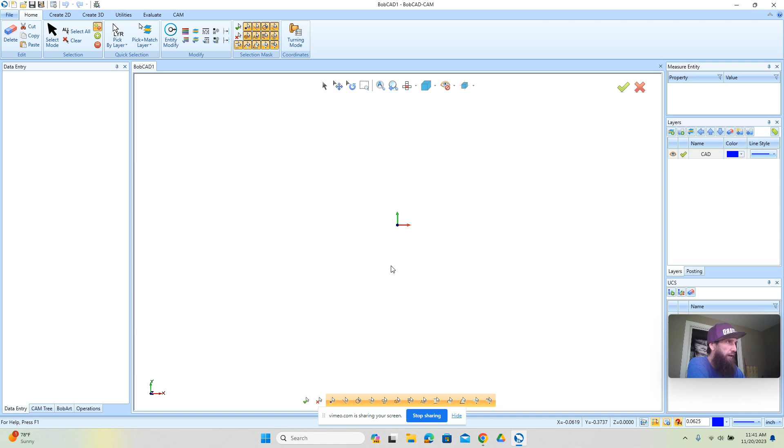All right, let's get into it. We're using BobCAD version 35 here. This is a really good piece of software, and it's going to make it easy for pretty much anybody to get up and running quickly. There's also Easel, Fusion 360, and a bunch of other packages out there, so you're more than welcome to have your go at it, but in my opinion, this is a great place for you to start.

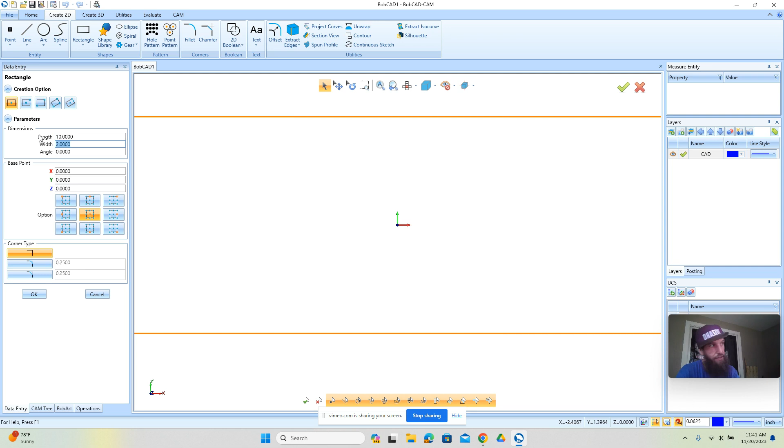Before we really do anything, a good option is to draw an outside shape first. In this case, I'm going to do a 10 by 10. This is just good general practice: draw your outside shape first, and once you've done that, draw whatever it is you're going to cut inside of there.

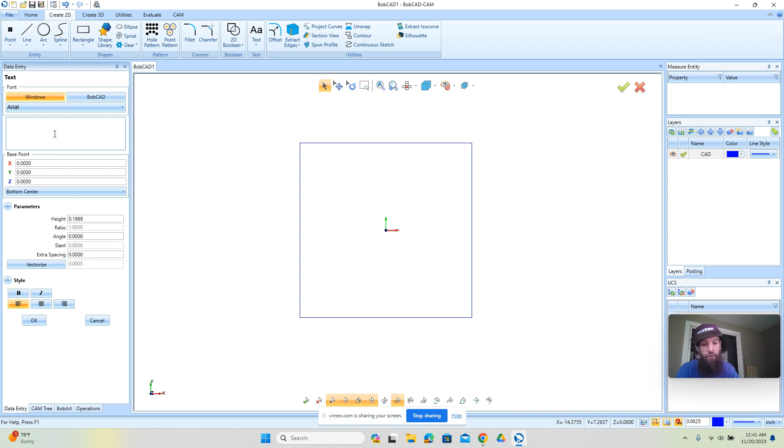Now, for us, we want to do some letters. So what we're going to do is just draw the letter A here, make it larger, something like this, put it on center, maybe make it bold. All right, so this is our letter.

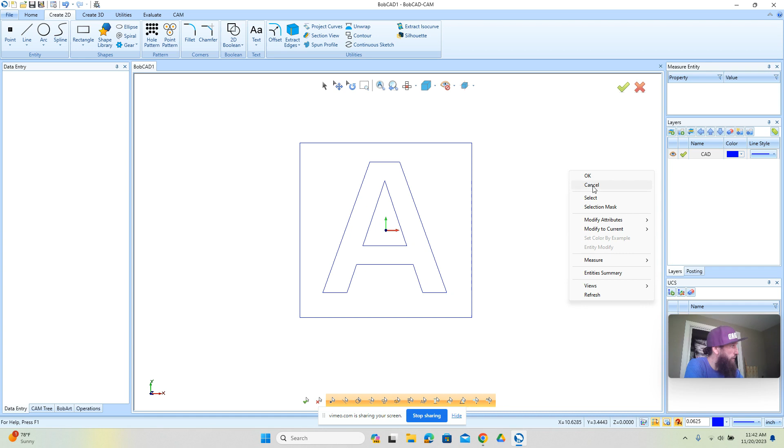Essentially what we're going for here is a stack-up style, so what I'm going to do is add a little 3D effect. Depending on your material thickness, you can kind of see the overall look. So let's say we're using quarter-inch material.

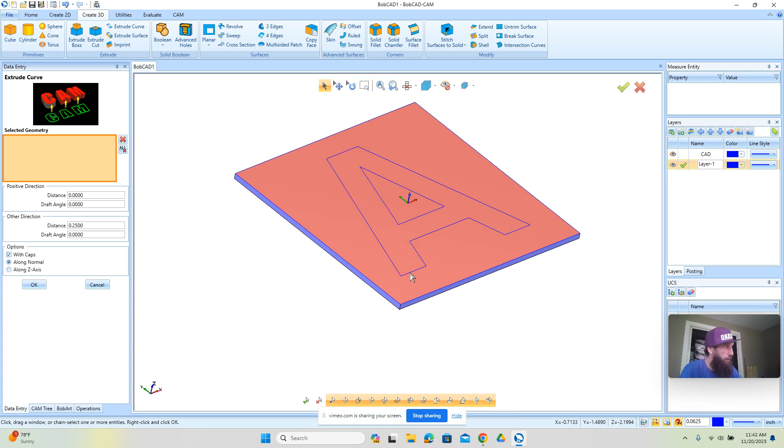We'd have our backer be a quarter-inch, and then our letter being a quarter-inch. We want to make sure the letter is going up, so to switch which direction, it's either this one or this one. We're going to make this a quarter-inch, so overall a quarter-inch for the backer plus a quarter-inch for the letter means a half-inch total.

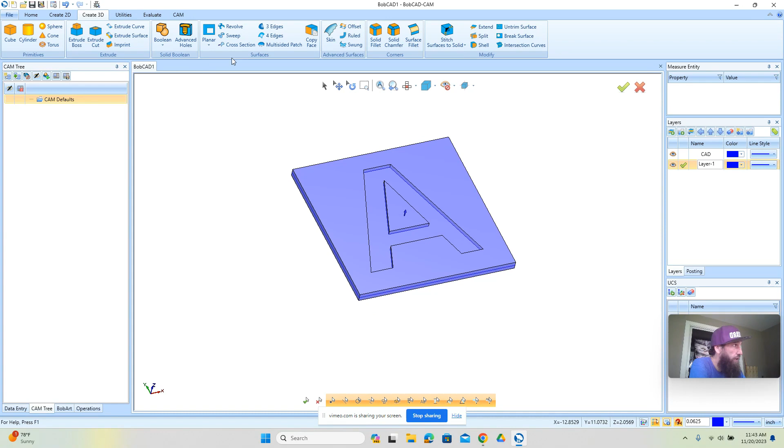You can see I made a mistake here, so let's go back to our CAD tree. If the CAD tree isn't open, go up here and turn that on. On this one, we're just going to edit what we selected - it appears we picked up a face as well, so we're going to remove that face, and then we just have the letter that we want to work with.

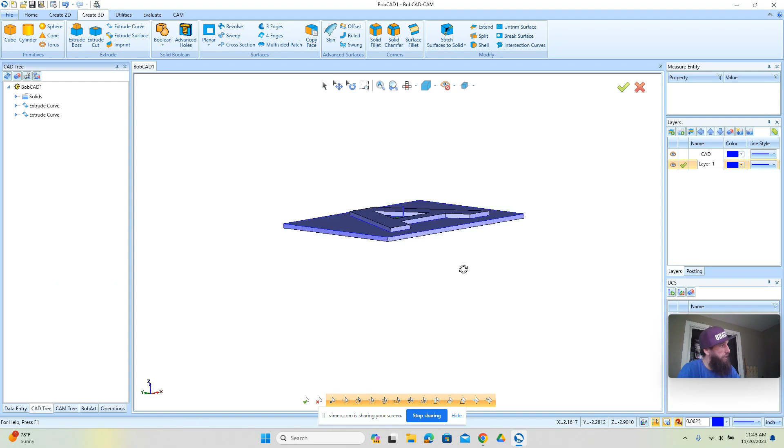Again, we can hit S on our keyboard for shading, so we can toggle that on or off. Essentially, what we're doing here is we have our backer and then we have our letter.

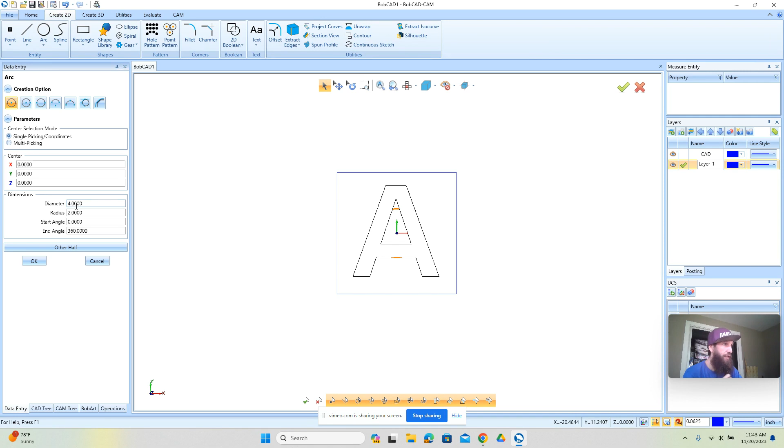Now, in order to machine this, we need to add some pin locations. We need to do that on the backer, but we also need to do it on the letter. So we're going to add some hole locations here, and in this case we're going to use just a quarter-inch dowel.

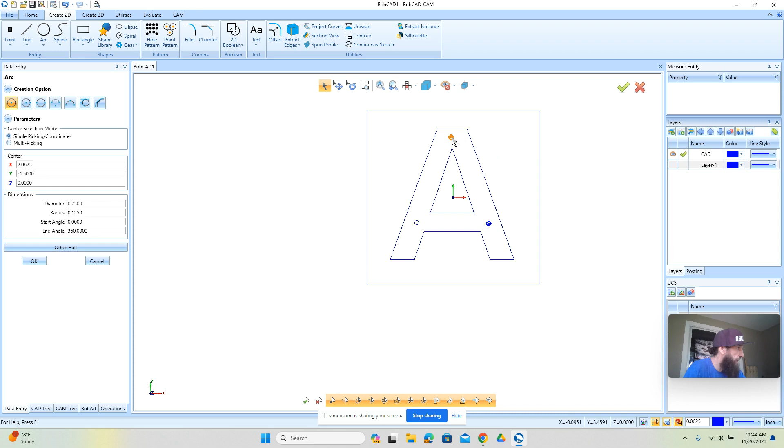What I'll do is put the 3D on its own layer so we can turn it off and hide it so it's not in our way, and then we can just pick a couple of locations. Now, this letter is a bit bigger, so I'm going to use 3 pin locations, but maybe you just use 2 - the whole point is just to support the letter. So for long, thin pieces, make sure we have some extra hole locations to support the letter on the back.

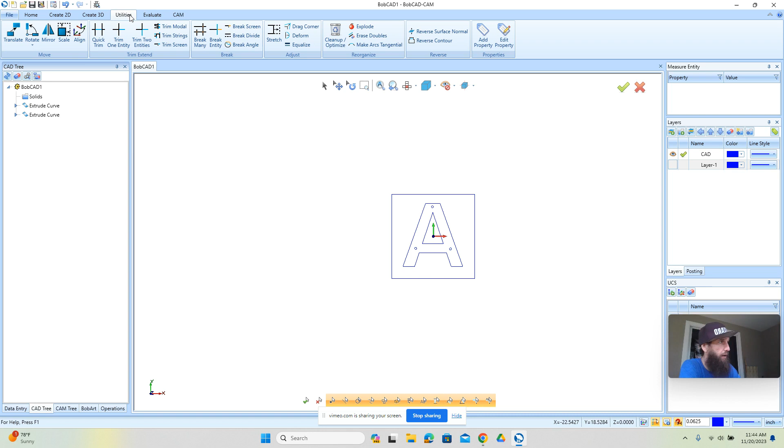All right, now when we cut this out, we're going to mirror it. To mirror the geometry, we'll go to Utilities - that's where all our editing is done. Come over here to Mirror, go ahead and select what it is we want to mirror, then pick a line we want to mirror around. We'll select this line here, and then we have our letters that we want to cut out with their hole locations.

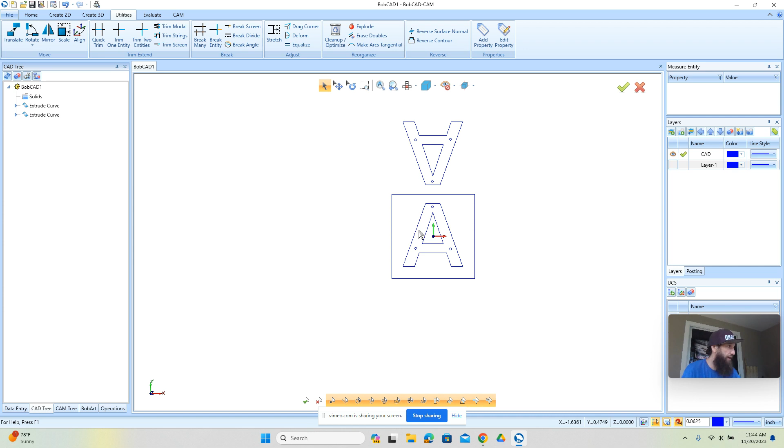And then over here, this A, we actually get rid of this - we don't need this one, we just need the hole locations for the backer. So on this side, I'm sorry, this side is the backer, and the only thing we need to do here is drill the holes. Then on this side, this is the letter cutout.

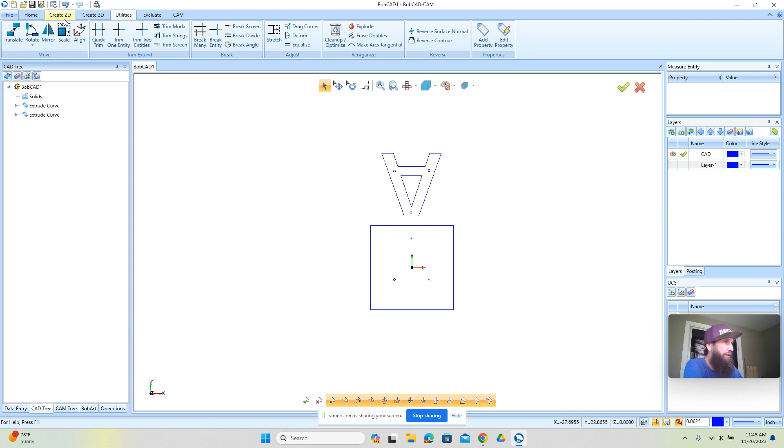Now, when we set up our material, we're going to put both of these in here. But what I'm actually going to do is just move it over to here, so we're going to go to Utilities and Translate.

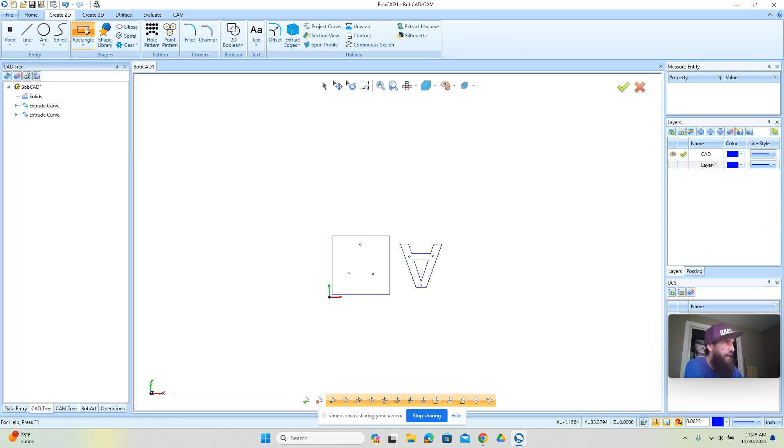I'm going to move this guy over to here like this. I'll say OK. And then what I'm going to do is move both of these up and inside of here. The reason I'm doing that is I haven't drawn my stock yet, but when we actually cut this out of material, maybe a 24 by 24, it's a good idea to draw the material and the zero so you can see exactly what's going on, the same way it would be out on the machine. You want to draw it in your CAD system.

So the backer shape and we have the letters. We're going to do the holes here, then cut out the outside shape for the backer, then do the holes for the letter, and cut out the inside shape and outside shape of the letter. Then we'll be able to pin these two together and paint them different colors. It's one of the methods you can use for indoor and outdoor signage, the pin method.

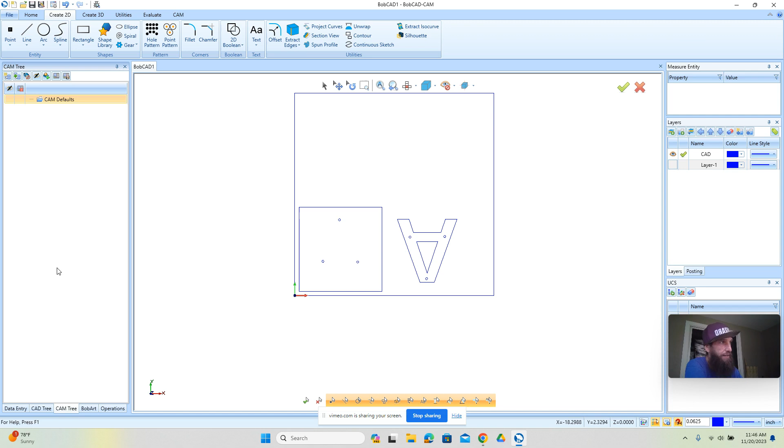Okay, so let's go over and get into the CAM tree. This is where all the machining is done. There's really three steps here, and every time you're thinking about a project, you want to break it up into these three steps. The first step is the CAD, that's when we're drawing stuff. That's what we just did, we just did the CAD step.

The second step is the CAM, that's where we're going to program where the tool is going to go to cut things out. And the final step is the CNC, that's when we're out on the machine and we're running it. Now, the reason I bring this up is in each of those different steps, you think about different things. You want to pay attention to different things, and you might even think there's a different checklist for each one of those steps.

So we did the first step, which was the CAD. Now we're going to do the CAM. Being the first time we're going through this, you can see there's nothing in the CAM tree here. So what we can do is set up some defaults, and we can also load some templates, which make programming jobs like this easier, especially if it's something you do all the time.

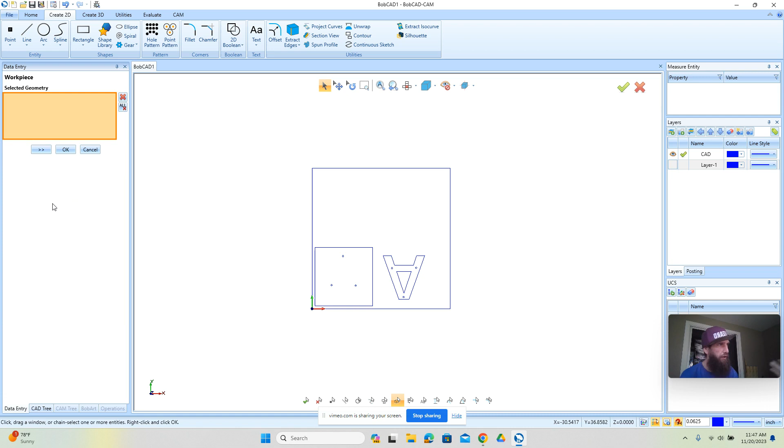So for us, we're going to just create a new job and pick the machine. This one's going to run on an industrial CNC router, probably one of the more common machines out there. Very popular, affordable, I just love them. They're really easy to set up and run. Highly recommend them, especially if you're new to CNC, or in the signage, indoor/outdoor signage, print and cut type market. This is a good piece of equipment to cut your teeth on.

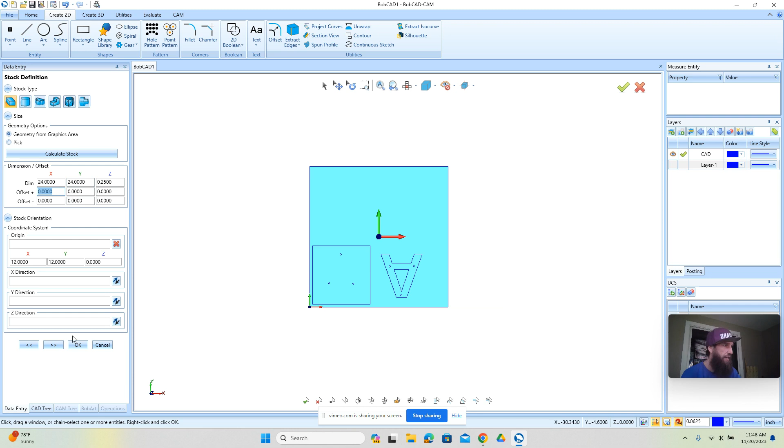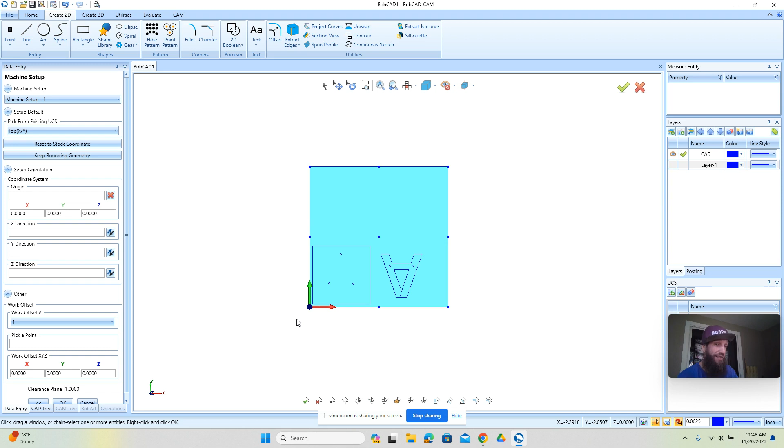So from here, we're going to just set what the material thickness is. Our zero is going to be this corner. Depending on your machine, like when I come on site and train you, we'll pick a position based on where the machine is and things around it. But you may pick a zero that makes more sense to you, or some of the more traditional locations is this upper corner here. You just really want to make sure the zero here matches the zero out at the machine. Once we've done that, we have our job set up.

From here, we just want to come in and make these holes. Now, these machines, some have tool changers, these machines don't, the industrials don't. A lot of home-based machines or single function equipment may or may not have tool changers, or you may have to change tools manually. So what we try to do is use a single tool for everything, and we look at our flute length, how much flute we have to cut, and our diameter of where we can cut.

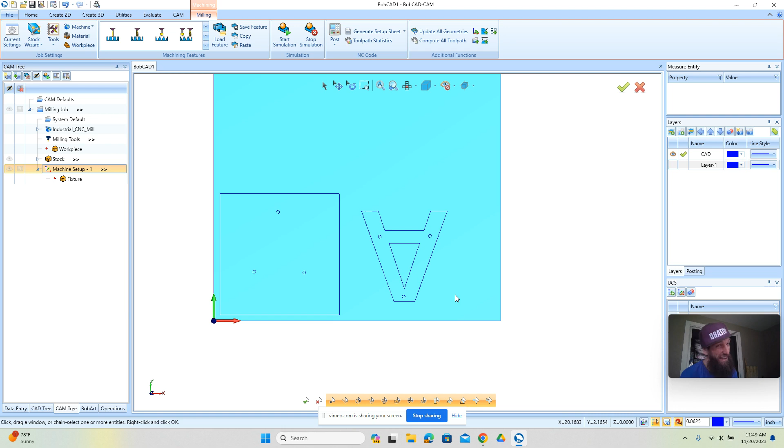So we have 250 holes, so we're going to profile everything. We're going to use one operation and do everything one way, and we need to make sure our tool is small enough to fit where it needs to go. So if we're in a 250 hole here, our tool would either need to be 250 and just go down into that hole, or it would need to be a smaller diameter than that in order to profile around it to offset.

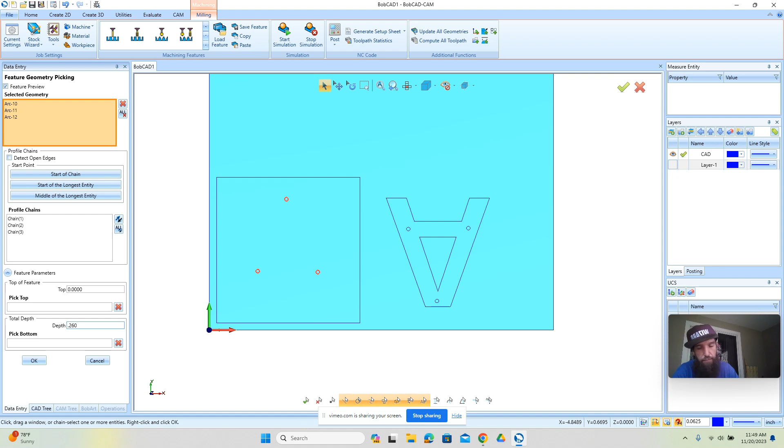So for us, we're going to do a profile routine. Profiling is probably one of the most common things you would do. I'm going to just start by picking these holes here. Our depth here, we're going to make it a little bit deeper, 260 - we're in 250 material, we're going to make it 260. We'll say okay on that. Now there's some different operations here, because once you select geometry, there's a bunch of different things you can do with it. For us, we're going to just use this rough routine, and we'll set our tool size.

On .1875. And then over here, our speeds and feeds - these particular industrial CNC routers, you control the spindle out at the machine, so we don't have to type that value there.

As far as cutting goes, I just cut everything at 50 inches a minute. This is a good starting point for most materials, especially something you would run on this equipment. It also takes the guesswork out of how fast to run. We'll run at this speed, and as we get more comfortable with it, we can turn up our overrides or start to run faster once we get more comfortable with how the machine moves, how to program, and load and rerun programs.

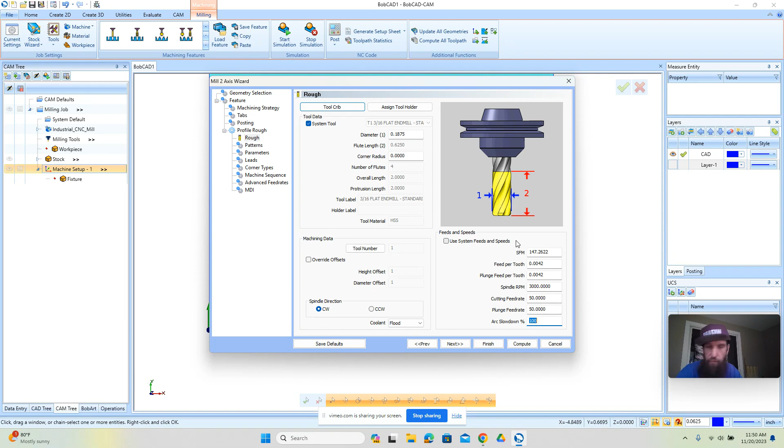All right, so this looks good for here. The only other thing we want to check is that we're not going to leave anything for finish. Then we're going to compute this, and you'll see the tool come in here and run around that. Now because the stock is showing, it looks blue, we can just come over here and hide that, so that's out of the way.

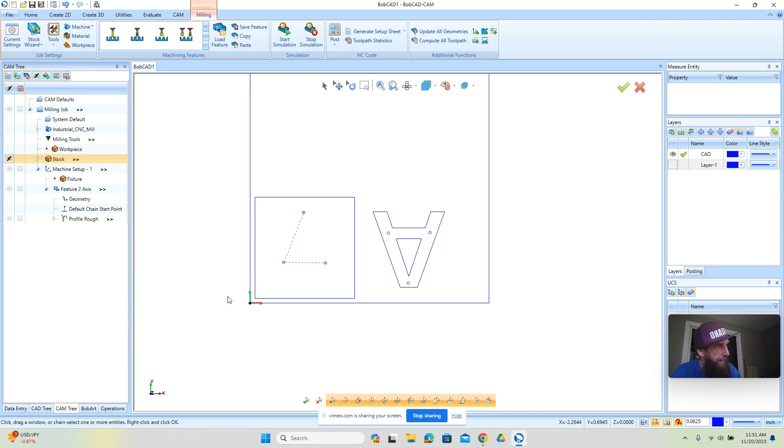This outside rectangle represents our stock, and these inside shapes represent what we want to cut. So we're going to pick what we want to cut - we're going to pick those holes, let's pick these holes too, I'm just window picking them. All right, we'll say OK and recompute.

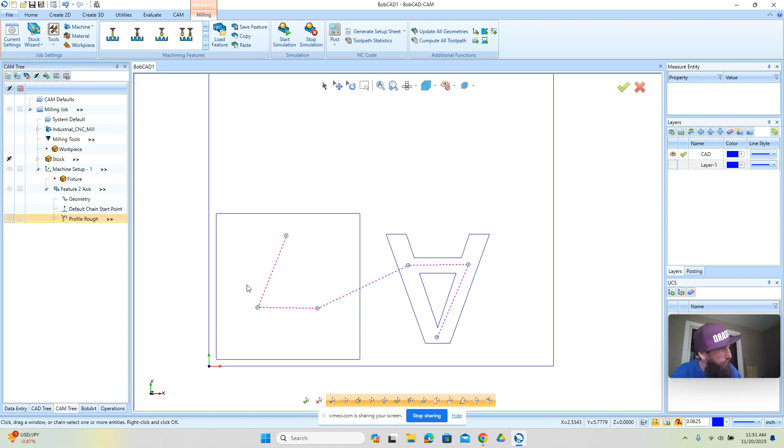Now you'll notice that they're cutting on the inside. Sometimes they might be on the outside, or one might be on the outside, so you want to pay attention to that. In this case, I'm just going to continue to add more geometry.

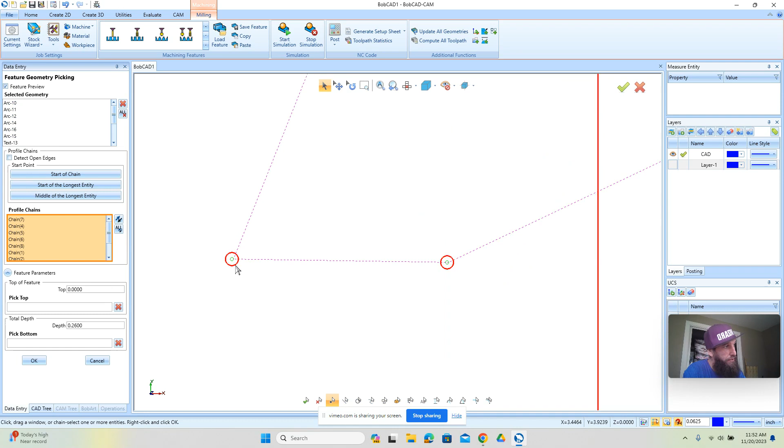So we're going to set all this stuff here. The rectangle or the square, because it's more than one shape, I'm going to hit Shift and left click on the profile to select multiple entities at a time, or a chain. Over here we can see all of our chain profiles, and if you zoom in you'll see the arrows and where they start and what direction they're going to cut. All the inside shapes we want going counterclockwise, and the outside shapes we want going clockwise.

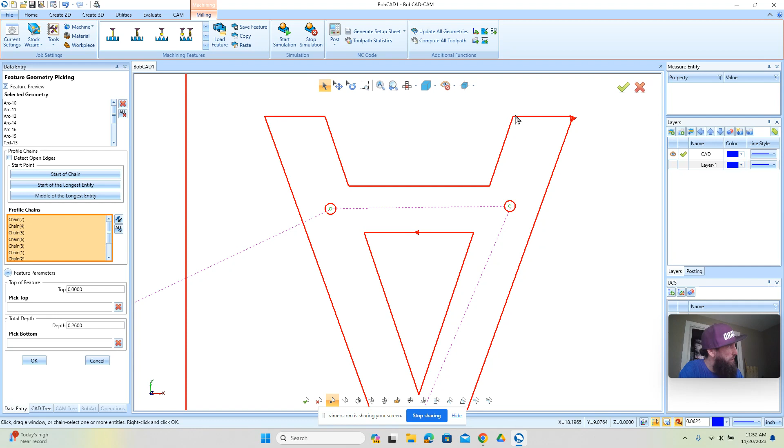If you have a vacuum table or not, your start position can play an impact on what happens. So we're going to move these over to here, and I'm going to move this one over to there, and we'll click OK. We'll compute this and we're looking to make sure the green geometry is on the outside. The green geometry is the center line of the tool where it's going to cut. So we just want to make sure that's where it's supposed to be. Everything looks good here.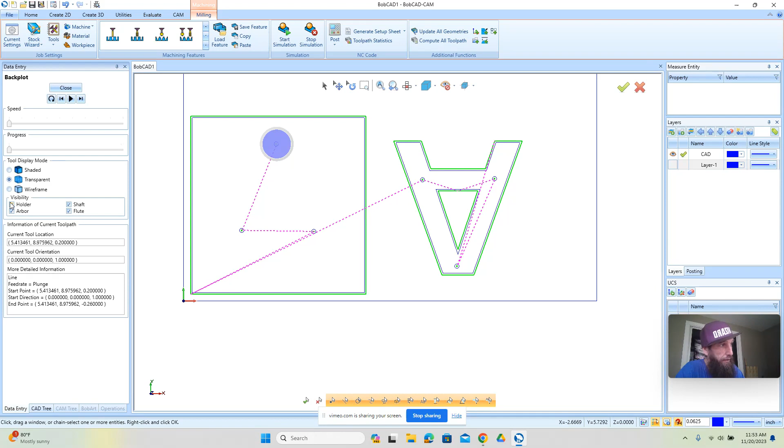Now, one of the ways you can visually check your cut order or what side you're cutting is you can right click and go to backplot. You're going to turn off your holder and really just look at the tool here. There's a couple different views you can go in, but I think you'll find this wireframe view will be helpful to show where that tool is. You can see it's on the inside of that one, it's on the inside of that one, and it continues to go around.

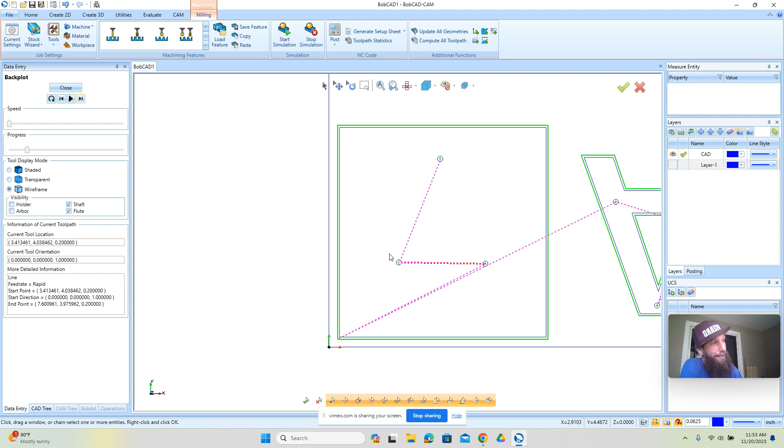Now, I use this view a lot, but if you don't like that one, there's a 3D view. So we can go to simulation - you'll see that up here at the top where it says simulation. Just press start, and that will show you your material and the material being removed. So we're going to see the cut order here, and again we want to make sure that it's cutting our inside shapes first and then cuts our outside shapes. And it does - that looks good.

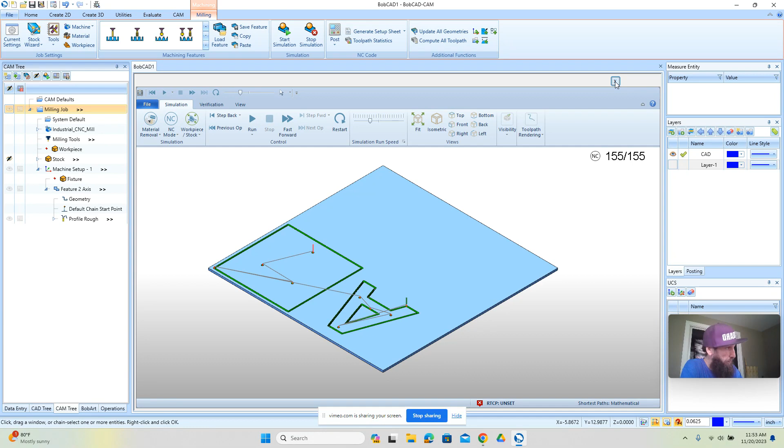Now we've got one tool, everything's cut into a single depth. There's one operation here - it's starting where we want it to start, and it's cutting where we want it to cut. So the next thing we would do is a post, and we would post the program, and this would write all the G code.

Now what we'll do here is a post and save as, and save it to local, and then we move it to a thumb drive, and then we bring it out to the machine, and then we move it from the thumb drive to a folder on the desktop, and that's where we load our programs that we're going to run. This is the workflow and the steps for pinup style letters. Once you've done this, you can do this with all kinds of different shapes, different thicknesses of materials, and it's very easy to do and an effective way to create indoor and outdoor signage.